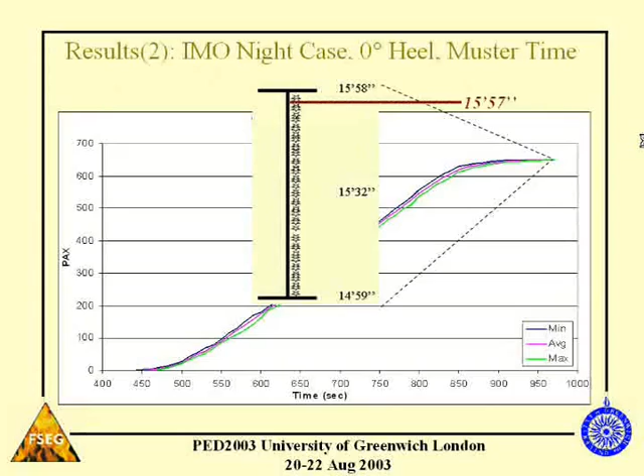Times between 15 and 16 minutes. And the value of interest is the 95% value, which is 15 minutes, 57 seconds. So, therefore, the 95% evacuation or mustering time for this ship is about 16 minutes.

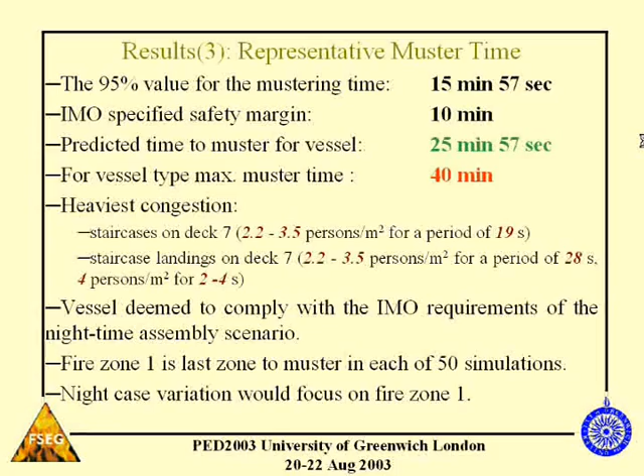We then add the 10-minute safety factor, which gives about 25 minutes, and which is well within the time range for this type of vessel, which is 40 minutes. Heaviest congestion is on deck 7, and is well within the limits stipulated by the regulations. Zone 1 is the last zone to muster in each of the 50 simulations.

Let's look quickly at the effect of heel and trim. At 10 degrees heel, there isn't much impact on the evacuation time. However, at 20 degrees heel, there is a 30-second increase in the evacuation time, which could be considered significant.

The effects of increasing heel can also be demonstrated by the arrival of people in Zone 1. As you can see here, there is about 10% reduction of the population of this zone with a 20 degree heel after 10 minutes.

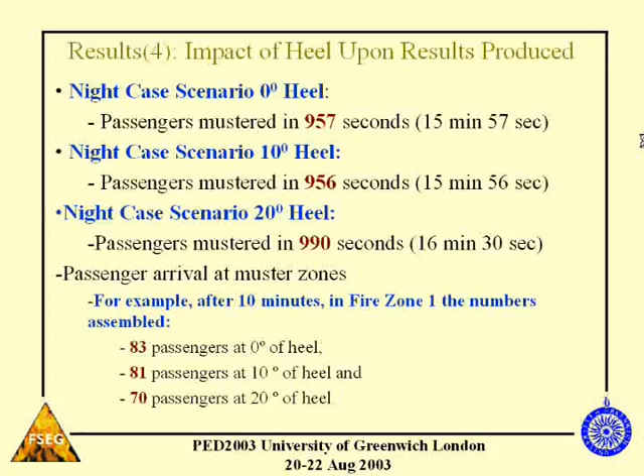Right. Now I'm going to look at the incorporation of smoke and fire on the evacuation. For the fire simulation part, we use a CFD package called SmartFire to simulate the spread of fire. SmartFire is also developed by the University of Greenwich within their Fire Safety Engineering Group and has many advanced features which are listed here.

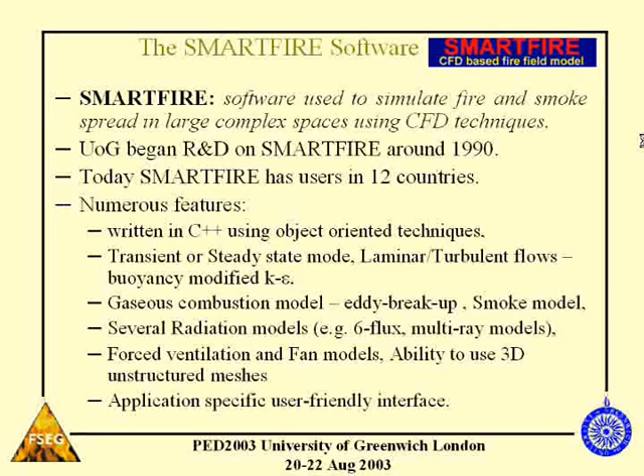IMO guidelines provide a safety margin to take account of issues excluded from the analysis, such as heel or fire. However, it is now possible to include some of these issues in the simulation. Again, a night case where all passengers are in the cabin will be demonstrated. The fire starts on deck 6, and we are only going to consider heat and smoke in this scenario.

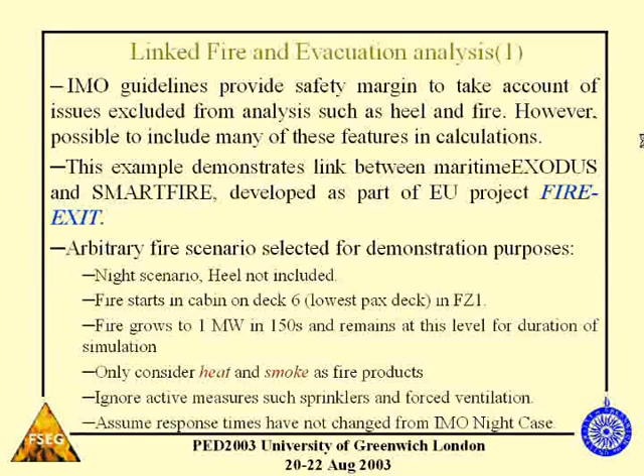And I must point out that we are ignoring the effect of sprinklers and forced ventilation in this example. Also, we will not be changing any of the response times of the population. Here we have the simulation in SmartFire of the heat contours. So this is SmartFire running, and it's showing the heat building up in the fire compartment and spreading out along the corridors.

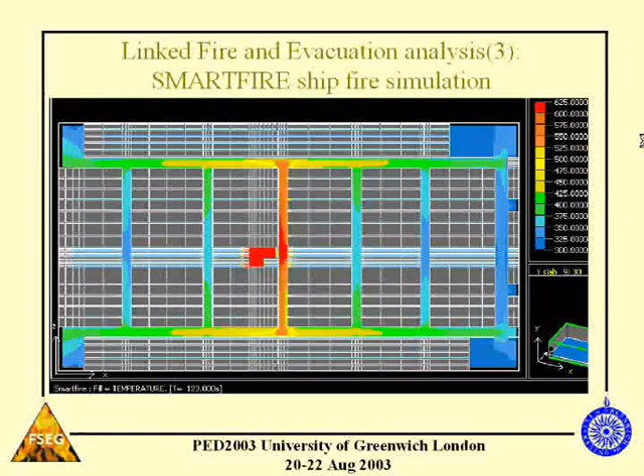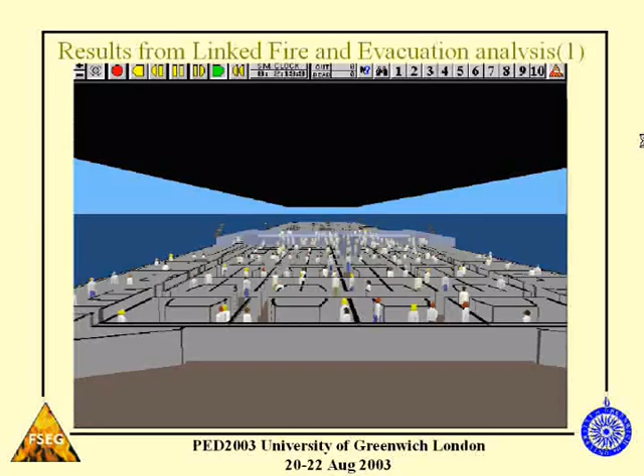Now for the results. The 95% time is increased to about 32.5 minutes. This does not include the IMO 10-minute safety factor, since it could be argued that it's not appropriate to add the entire safety factor, since we are now including some of the features that the safety factor is meant to account for. Therefore, you could argue that this vessel has passed the IMO specified 40 minutes, as stated.

However, one thing that should be pointed out, there's a significant difference between the fire and non-fire scenario, is the likelihood of casualties.

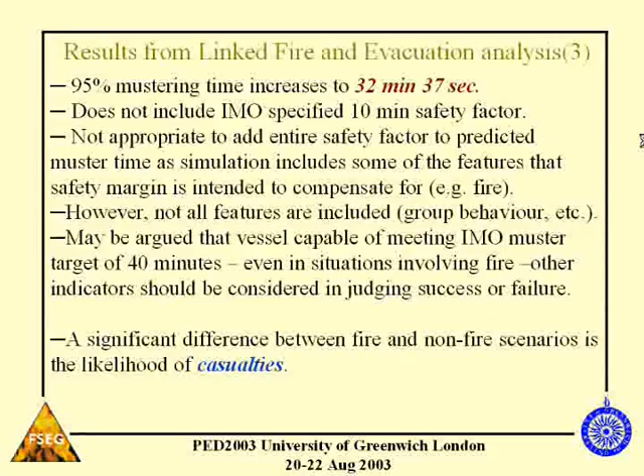Therefore, as a summary of the results obtained from this fire scenario, we have a 32.5 minute evacuation time, and I'll put double question marks for the IMO safety factor, because, as stated earlier, is it appropriate to add the complete 10 minutes? So, again, on principle, this vessel passes the requirements. However, there are 26 fatalities.

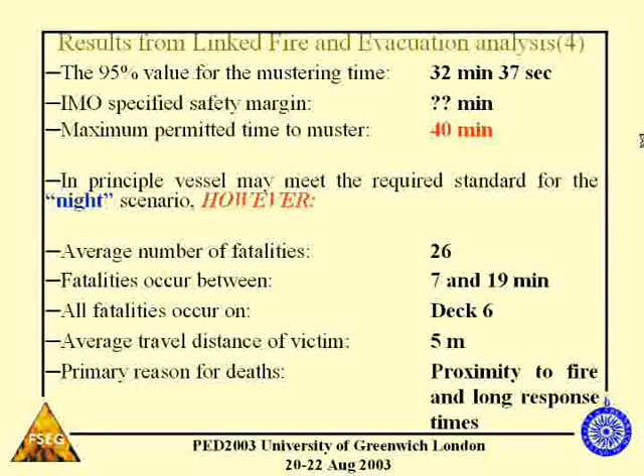Fatalities all occur between 7 and 19 minutes. They're all on deck 6. Average travel distance of the fatalities is 5 meters, and the reason for death is their proximity to the fire and their long response time.

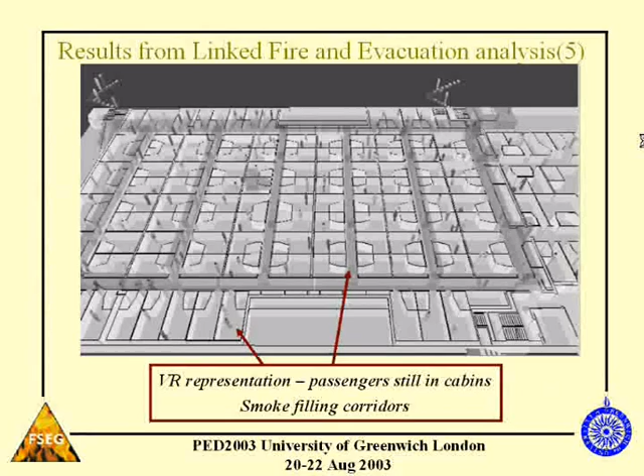Right, here we have the representation of the passengers still in their cabins and some of the smoke spread. Here we have the contours for the smoke within Exodus. Notice the density is in the cabin and in the corridors.

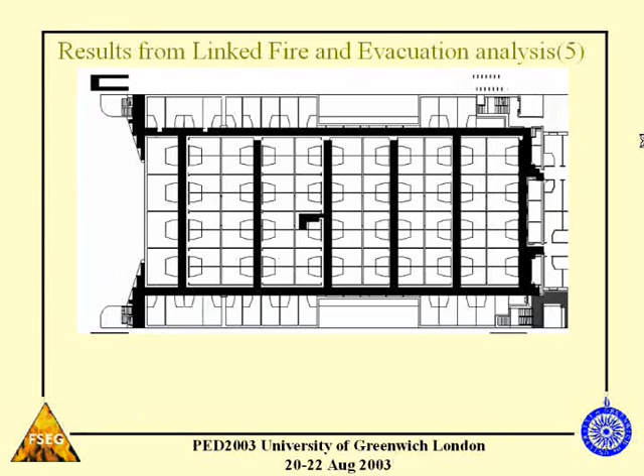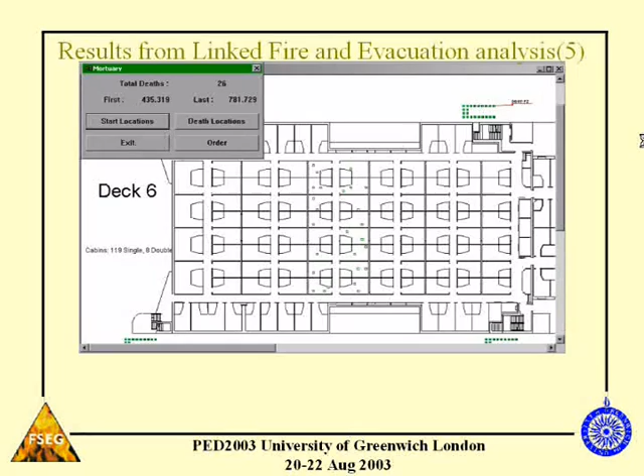Here we have the start locations of the fatalities. They all start in their cabins. And here we have the death locations of the fatalities. Notice that they're all in the corridors where the heat was quite severe. Here we have the paths of the fatalities. As you can see, they travelled approximately 5 meters.

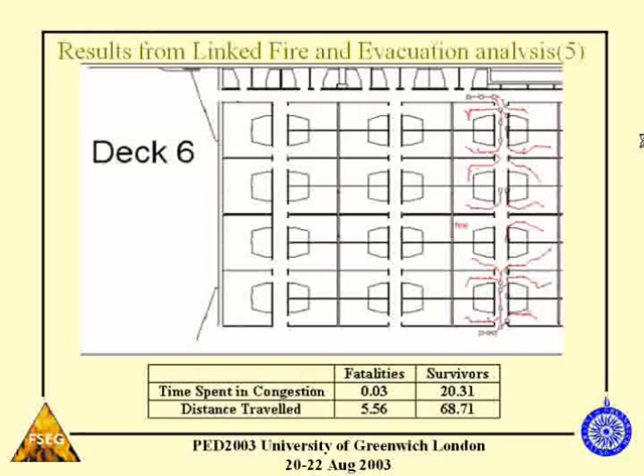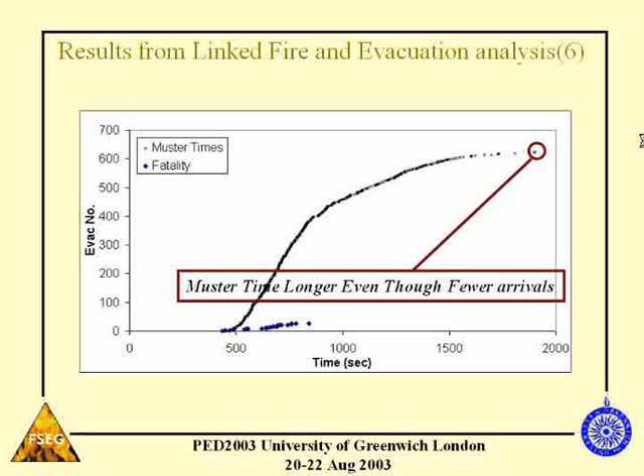Here we have the mustering. Here we have the time to muster. If you look, the arrival times at the muster station are longer, and the reason for this is people are affected by the smoke and are forced to crawl in the evacuation. Fatalities all occur between about 450 and 900 seconds.

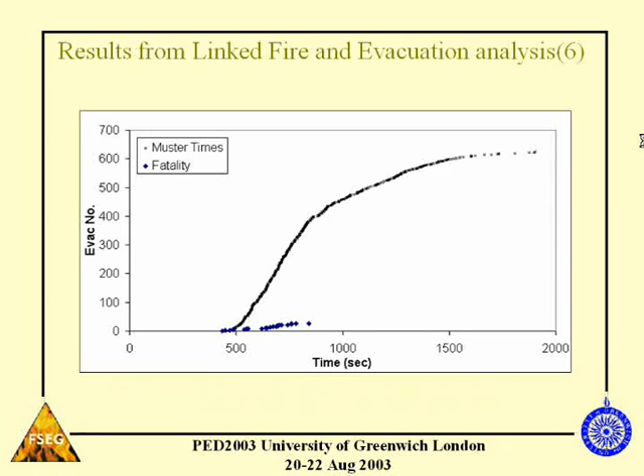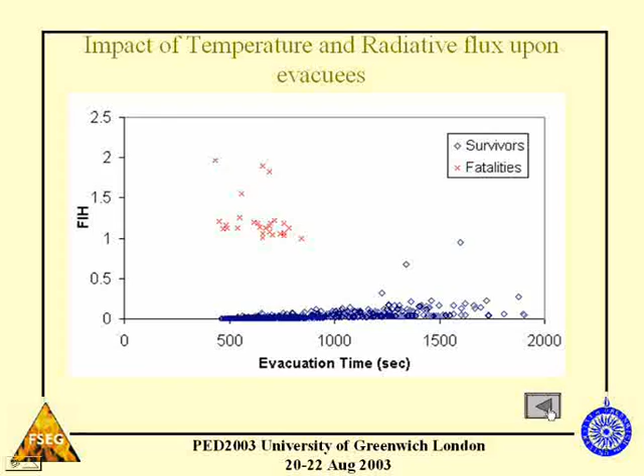So, as a summary, it should be noted that the majority of people are not exposed to severe conditions. However, several people are likely to suffer serious injuries. For instance, we have 2 people here with high doses of fractional effective heat dose, and there's a large number of people who are exposed to, if we go back to the previous slide,

If I go back, 25% of the people on deck 6 receive doses of radiation greater than 10% of fatal dose, which is very important to establish what effects will happen after the evacuation. If we had considered toxic gases, death tolls and injury levels could have been expected to be far worse. Equally, we haven't considered the active firefighting systems, which would have countered some of the impact of the fire.

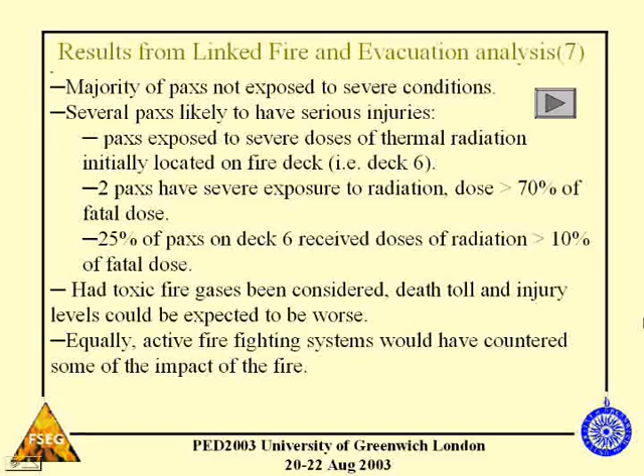So now for the conclusions. Ship safety procedure models will bring important issues of safety procedures to the fore of ship design. They can be used to investigate realistic scenarios. Onboard versions of the software will allow ship operators to train staff and help them with firefighting and passenger evacuation. Use of sophisticated evacuation tools will enable fewer arbitrary assumptions to be imposed and allow conditions to be modelled rather than assumed.